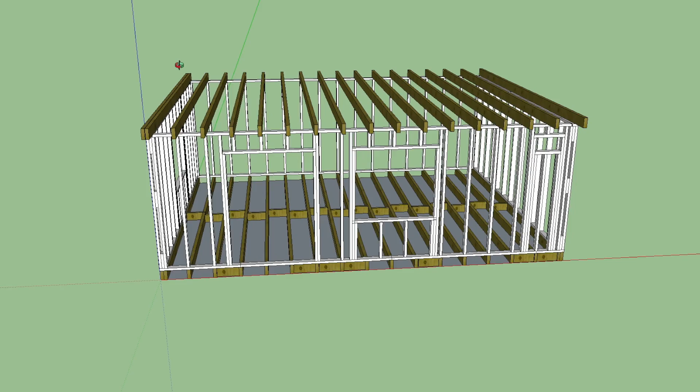In the previous videos, I cleared a space for my garden room, discussed planning permission, and created a design. This 3D drawing was the extent of my design. I'd recommend downloading SketchUp. It's a free program and there are plenty of videos to help you get creating. I quite like to keep things fluid, so a rough sketch was all I needed.

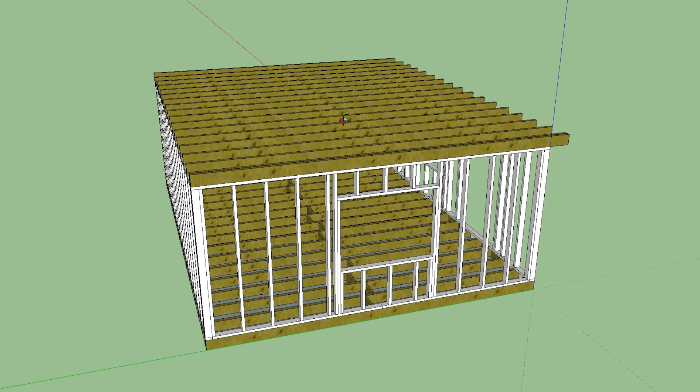Everyone's different, so others will want to design down to the millimetre before they cut their first board. Either way, I highly recommend having at least a rough design in SketchUp done for estimating the amount of materials you'll need. My building's dimensions are 6.5 metres by 5 metres.

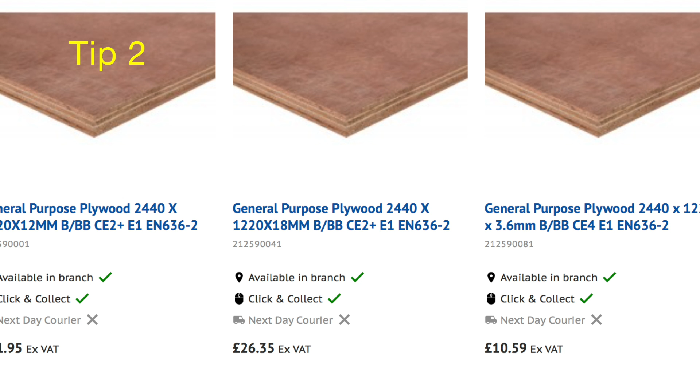However, it's definitely worth thinking about laying out your building in imperial rather than metric. In the UK, we seem to use both systems, and materials come in both. The build requires a lot of sheet materials, OSB, plywood, plasterboard, which come in 8 by 4 feet dimensions, which is a very awkward 2.44 times 1.22 metres.

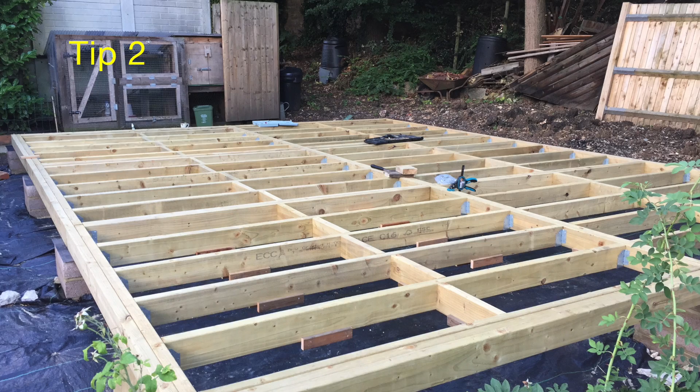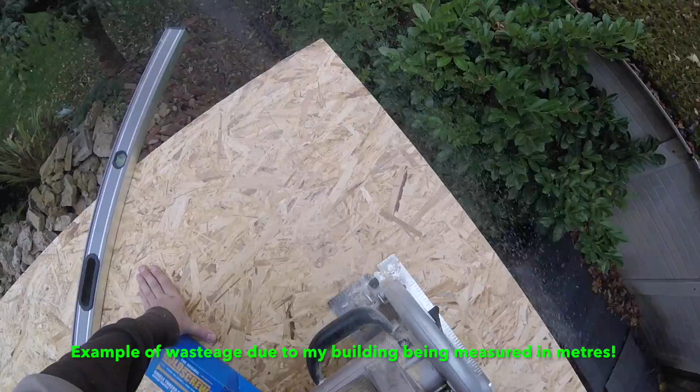So for the majority of the build, I use feet and inches when laying out the floor and walls in order to avoid having to cut down sheet materials and to reduce wastage. If I were doing it again, I would probably use building dimensions in feet rather than in metres. And throughout the rest of this series, you'll see I flip between the two systems quite a lot, depending on what I'm measuring.

The first task is laying out the building in the right location, at the right size, and getting it square. I had some long cedar lengths given to me by my neighbour, which I cut to the right lengths. 2 lengths at 6.5 metres and 2 5 metre lengths. Where I didn't have a length long enough, I screwed 2 pieces together.

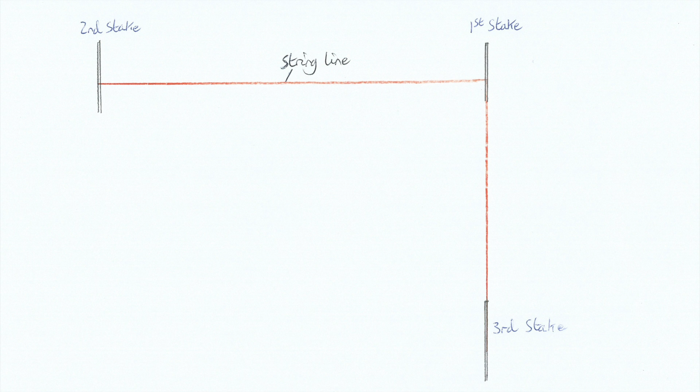I located exactly where I wanted one corner, in my case at the boundary, and hammered a metal stake in place. From there I laid out the cedar to create a rough outline of the building. I then hammered in 2 more stakes at the 2 corners at right angles to the first and used a string line to connect them. I then measured the corner for a 90-degree right angle.

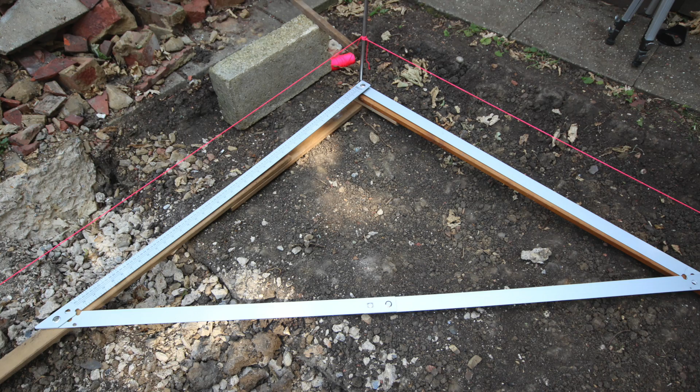There are 2 methods for doing this. The first is to hold up a folding square to the string. This is the simplest but least accurate method unless your building is very small. When folded out, it creates a perfect right angle triangle to compare your corner to. It's useful for getting the angle reasonably close before using the second method.

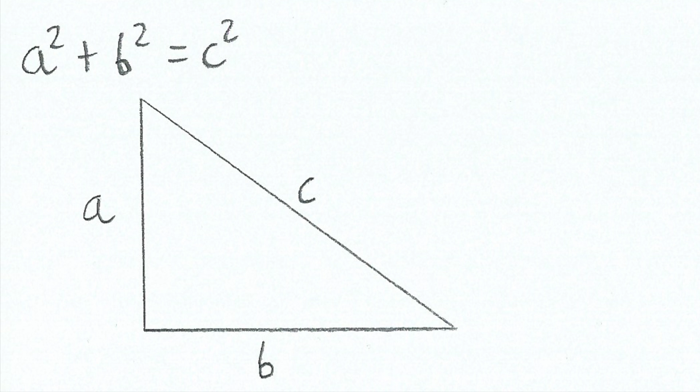The second is the 3-4-5 method. This uses Pythagoras Theorem, a squared plus b squared equals c squared. Remember that? A perfect right angle triangle is created by measuring 3 units along one string line and making a mark, then measuring 4 units along the other and making another mark.

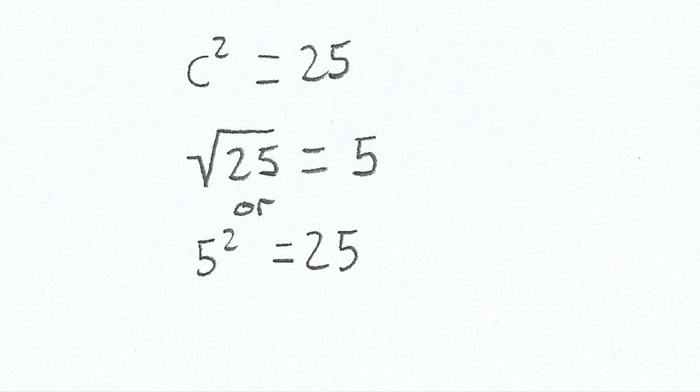3 squared equals 9 and 4 squared equals 16, the sum of which is 25, which equals c squared. The square root of 25 is 5, so therefore length c, the diagonal or hypotenuse, is 5 units if the corner is a perfect right angle. The units don't matter as long as they're all the same. You can use centimetres, inches, feet or metres.

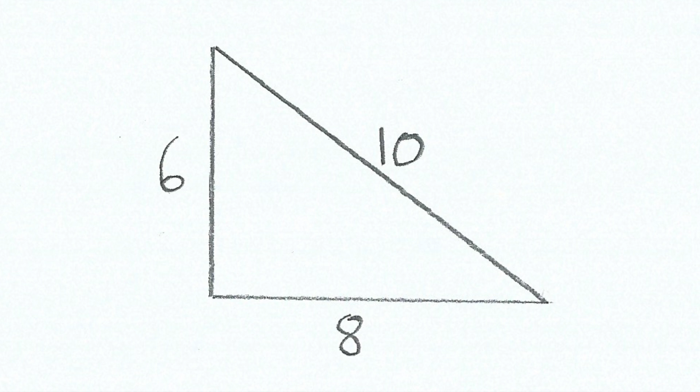Obviously the longer the measurements, the more accurate the result. And the same works for 6, 8 and 10, which is useful if you're using feet. When the measurement was less than 5, I knew that one or both of the 2 stakes needed to be moved away, and if more than 5, then one or both needed to move closer to each other. It's quite satisfying when they all work out, and it's worth taking time over this to get it right.

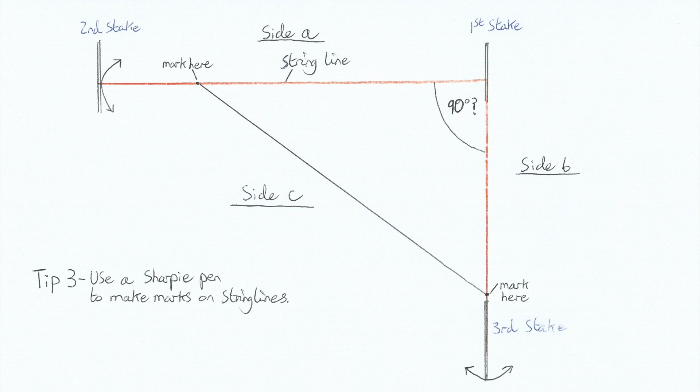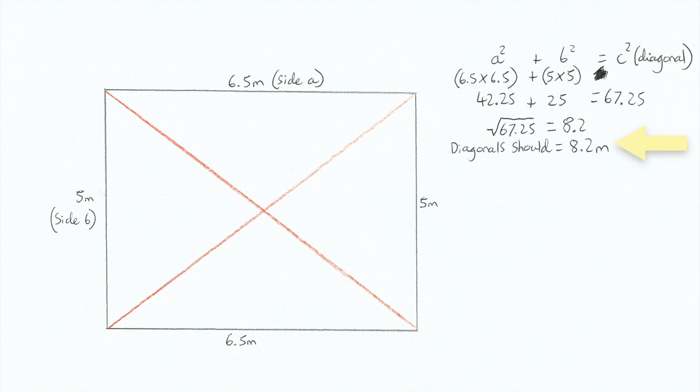Once the 3 stakes were in the right place, I hammered in the 4th and then used the 3-4-5 method on that corner as well. Once this was done, I checked my work by measuring it across the 2 diagonals. If they were exactly the same length, then I knew that the building was completely square and all the corners were at right angles. This last method can also ensure that the building is the right size, again using Pythagoras. As my building is 6.5 metres by 5 metres, I knew that the diagonals should be 8.2 metres across.

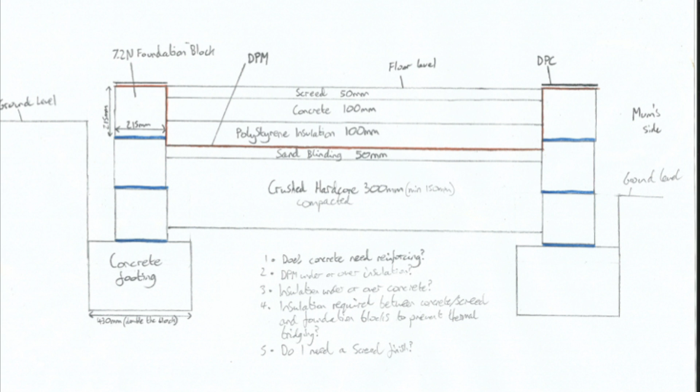Once the building's dimensions were laid out, I could look at the different options for foundations. I'll run through a few of the ones I looked at. The first is the most complicated and expensive, but certainly the most solid. This is the method used in most house extensions. It involves pouring a concrete slab with the insulation within the foundations, removing the need for a wooden floor. The sides can be either poured separately or dense concrete blocks can be used.

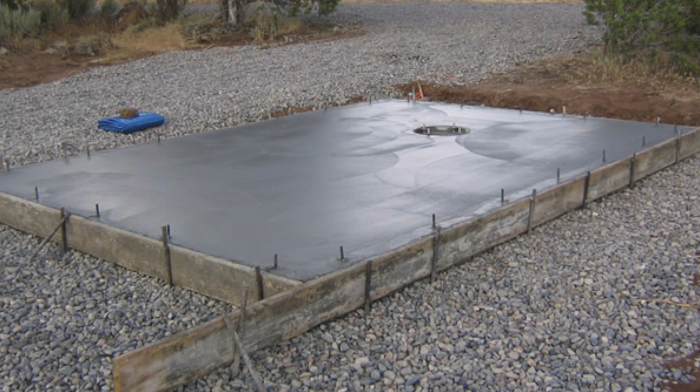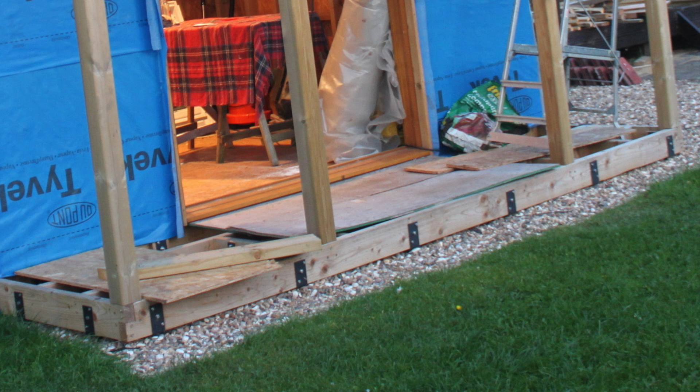A raft foundation is similar, but is useful for sites on clay soil or near trees, as the foundation moves as one floating raft. Another option is a simple concrete slab for the wooden floor joists to sit on top. This is a pretty common method for sheds and garden rooms. Another common method is to use a post hole digger to sink wooden posts or metal brackets into the ground and to pour concrete around them to hold up the timber floor.

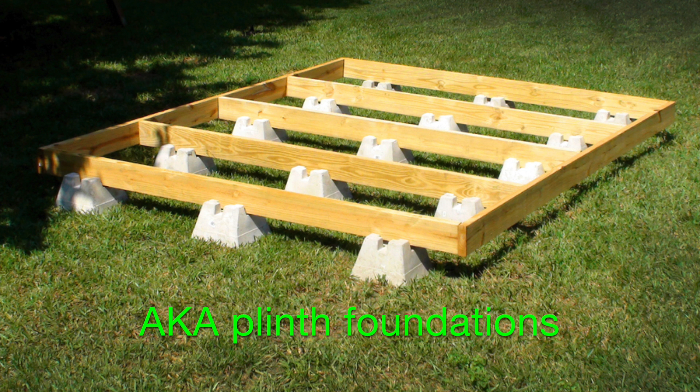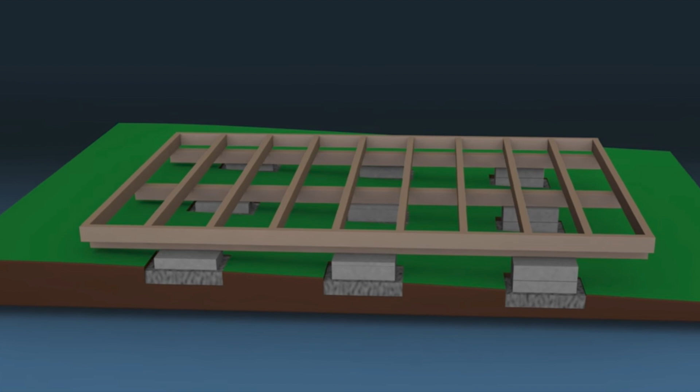However, the option I went for is the easiest and cheapest and doesn't require concrete to be poured at all. It involves piers spaced under the floor joists to hold the building up off the ground. There are a few specialised products on the market, such as these, but they are quite expensive and, in my opinion, not really necessary. I use 7 Newton per millimetre squared dense concrete blocks at £1.44 each. It's important to use the dense ones as the whole weight of the building goes through them. Another great advantage of using blocks is that the timber floor can be moved around on top of them, giving some flexibility if they are not perfectly in the right spot.

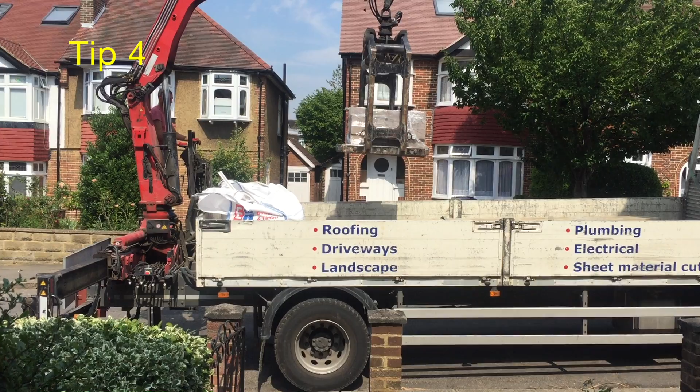When buying materials for the build, I avoided the likes of B&Q and Wickes, and instead used local builder and timber merchants, as they offer much better value. Two great websites to check for prices are Selco and Builder Depot. To buy from Selco requires a member's card, so you need to have a business to get one, but they've now put up all their prices online, which is pretty useful when comparing against smaller merchants. Another tip is to buy the floor joists at the same time as the blocks, to use to help check the piers for level, which I'll show in a bit.

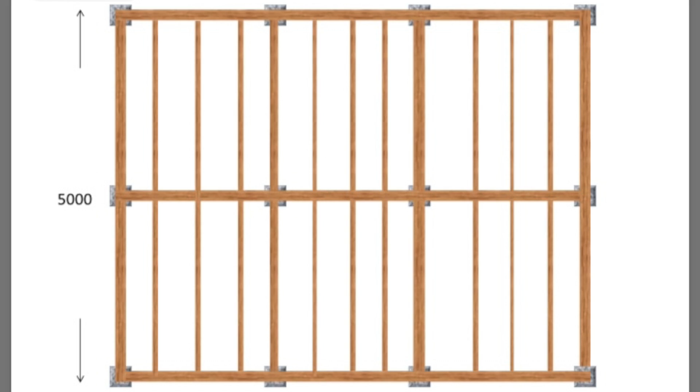The required number of piers and the span between them depends on the size of the building and the depth and the quality of the timber used in the floating floor. I'll go into detail on span tables in the next video, but this is something that you'll need to know before deciding how many piers your building needs. For mine, I used 12 piers spread out like this.

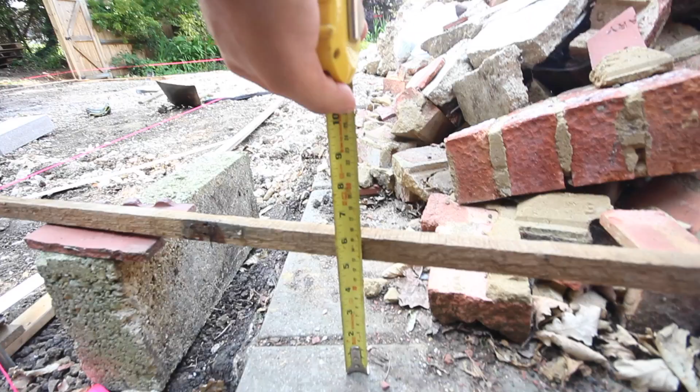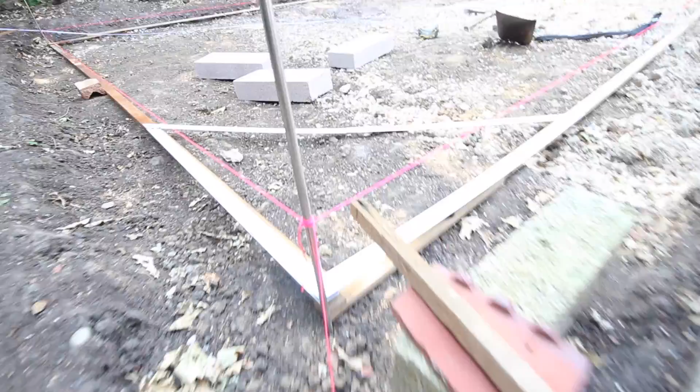I started my first pier in one corner, where I could roughly measure 15 centimetres, 6 inches, from the surrounding ground. This measurement is from building regs and lifts the floor a good amount off the ground so as not to be affected by splashes from rain and also to allow good airflow under the building. I transferred this using a stick and moved the string line up or down accordingly. The string line is where the top of the pier needs to come to, and it doesn't need to be exact, just somewhere near. I dug down far enough to reach firm, undisturbed soil.

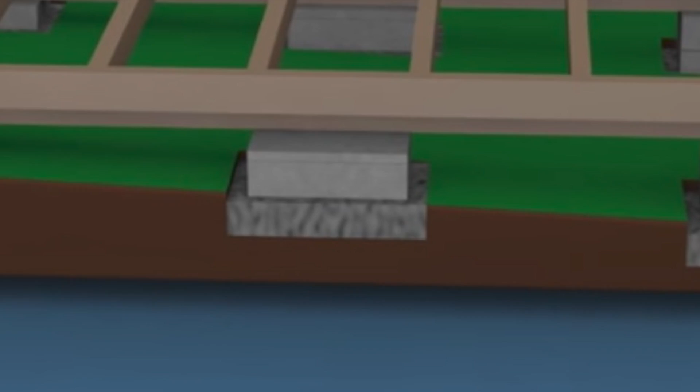The blocks need to sit on at least 10 centimetres of compacted hardcore, which are small pieces of concrete from 40mm all the way down to dust. These interlock when compacted, creating a solid base. I had plenty from tearing up my garage floor, but it's not that expensive to buy. The first block should be sunk at least halfway into the ground, below ground level. As they're 100mm thick each, it's quite easy to work out where the first one needs to be so that the top one reaches the string line.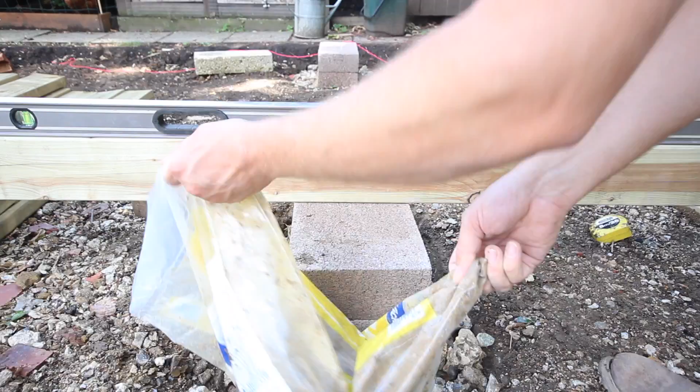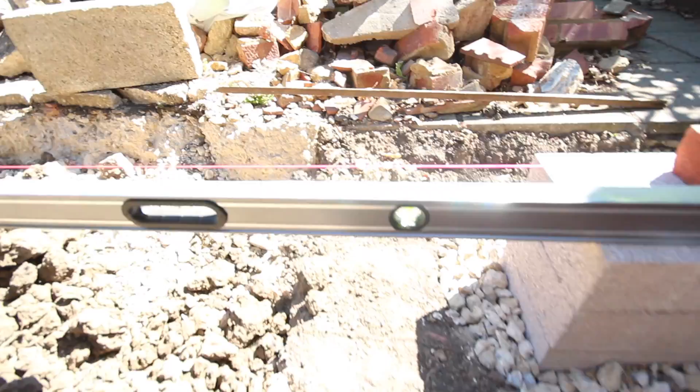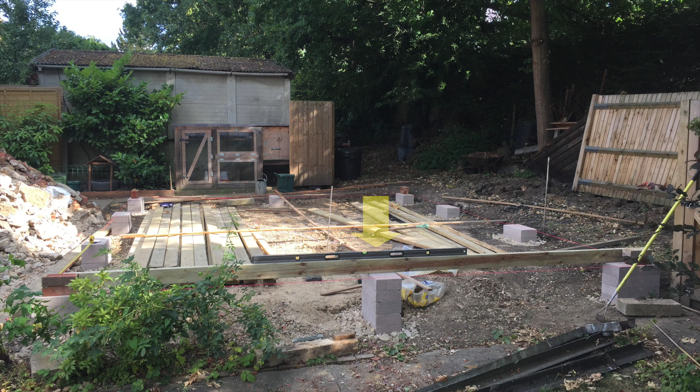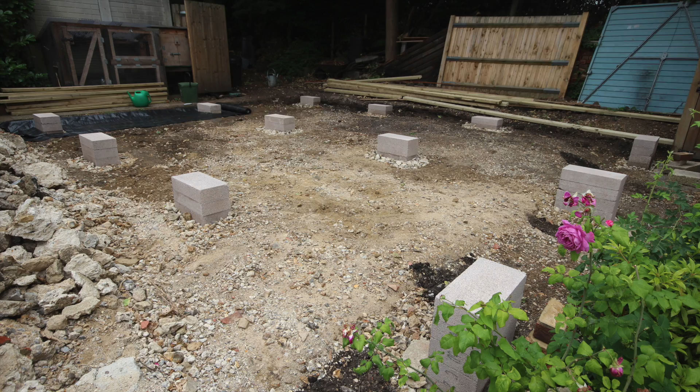Once the first pier was complete, I could use the top as a reference to get the others level. It's worth investing in a long, good quality spirit level. I compared against as many of the surrounding piers as possible. The timbers come in useful for this. I chose the straightest timber I had for best accuracy. Once all 12 were done, I laid down weed fabric to stop anything growing up and into my floor from below. It comes with plastic pegs to keep the fabric in place.

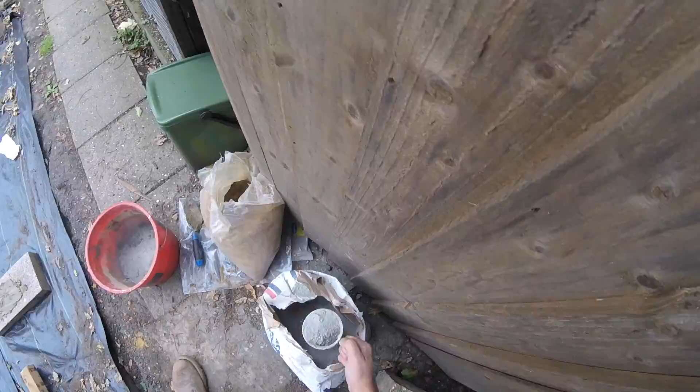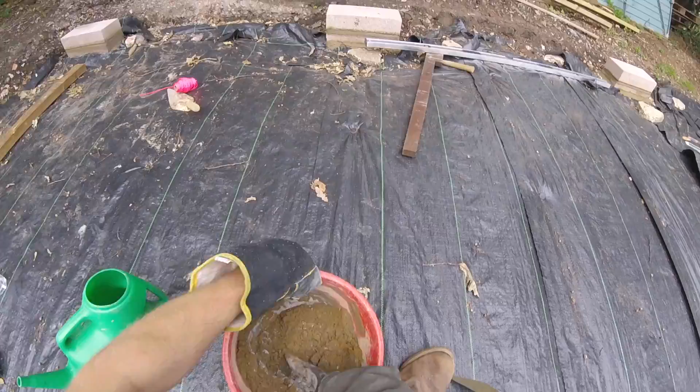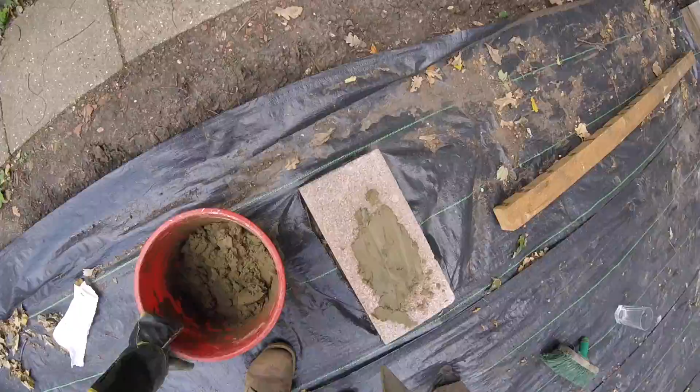My first mistake was not cementing the blocks together. After some more research, I realised this was an absolute must. As my site is on a slope, each pier has a different number of blocks, so to counter this, I used thick layers of mortar on piers with 3 blocks, and then thinner layers on those with 4 or 5 blocks. Again, I checked each one for level with the surrounding blocks. I'm no bricklayer, but the mix I used was 1 part cement to 4 parts sand. It's important to have sand without any stones in it for this.

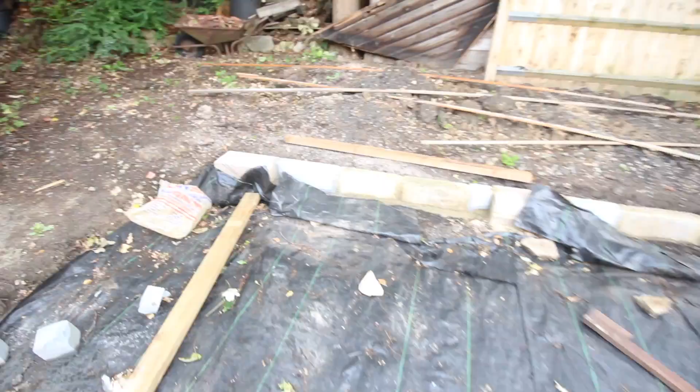Once this was done, I also created a retaining wall at the back, as the alleyway behind is higher than under my building. So that's the layout and foundations done. In the next video I'll cover how I made the floor, insulating and covering it.